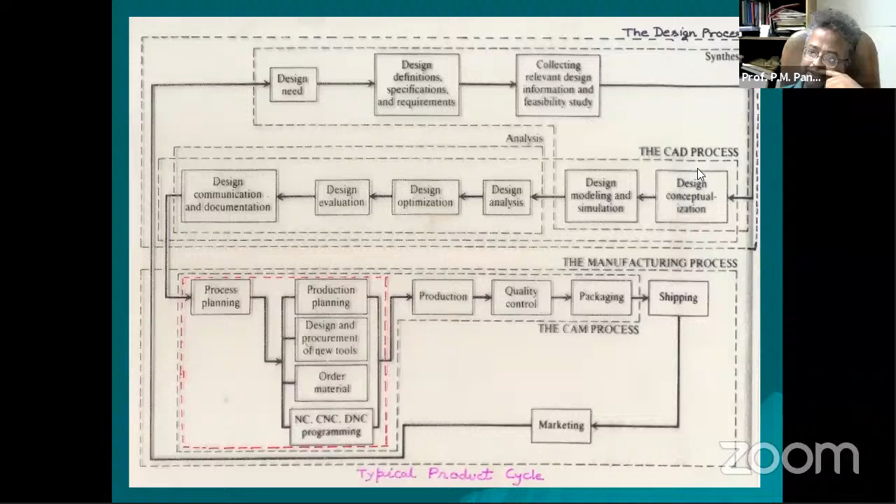Later on, in industry today, we go with the CAD process. In CAD, we try to conceptualize the design using some software. Then we try to do modeling, simulation. We try to analyze the complete design using, say, finite element packages. And then we do optimization, because any design we do has to be an optimum design. Only then can it form, actually make, a product. So we do the design optimization.

Now, once somebody has optimized a design, the next and foremost important step is to evaluate those designs. Because any product you have made, you have to first make a few copies of that product and do the testing. Only then will you become confident whether it is actually performing the same function for which it was designed. So this design evaluation becomes a very important function, and it also takes a lot of time.

Now why does it take a lot of time? Because when you have designed a new product or made some changes in a product, the changes or the new product may have typical materials, or very difficult surfaces to make. Because of these reasons, prototyping, or making the first few copies of that particular product, is a time-consuming job. And sometimes the situation may be that even the technology, or how to do that, may not be known.

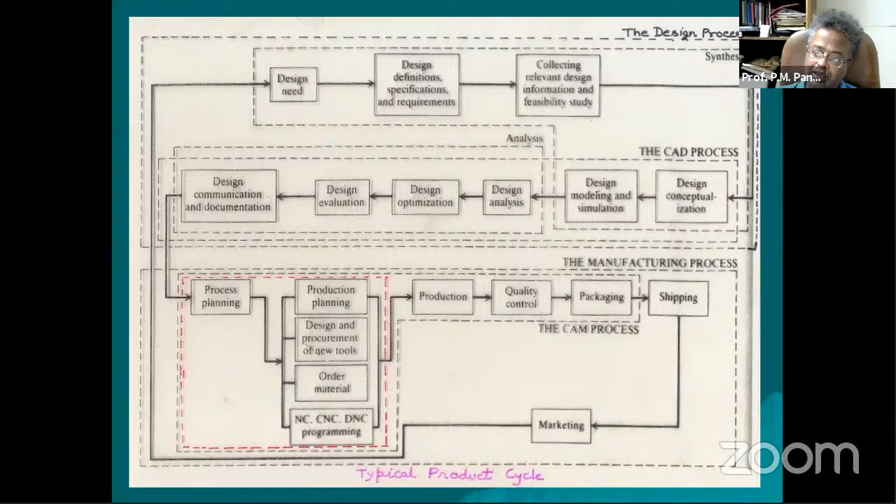And here is the importance of rapid prototyping, which has shown its importance. Because if you can do this particular function in a very short span of time, you may compress your entire project and be among the first to cater to the dynamic need of the customers, and you may be the best profit maker in this competing business scenario.

So that's why prototyping or model making is one of the important steps to finalize the product design. It helps in conceptualization of a design. Before the start of full production, a prototype is usually fabricated and tested.

Earlier, this activity used to be in the hands of skilled craftsmen. These skilled craftsmen used to work under the supervision of engineers, and they had a lot of experience. That's why they were fewer in number, and they used to take a lot of time. Their demand was high, and this function used to take a lot of time.

So people thought, why not go for soft prototyping in order to minimize the delays. People tried this in the mid 1970s or so. They tried to model things using 3D curved surfaces and do virtual simulation, virtual prototyping.

But that is not a very good approach, because once you are doing simulation, you are solving certain differential equations, certain equations, and the assumptions involved in that simulation come into your way. So though you will be close to the predictions, your predictions may sometimes not be that good. That's why people tried other ways.

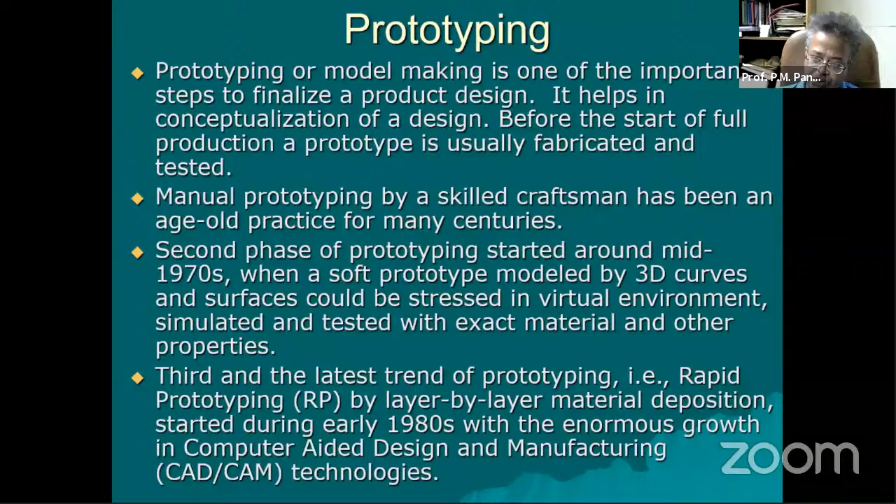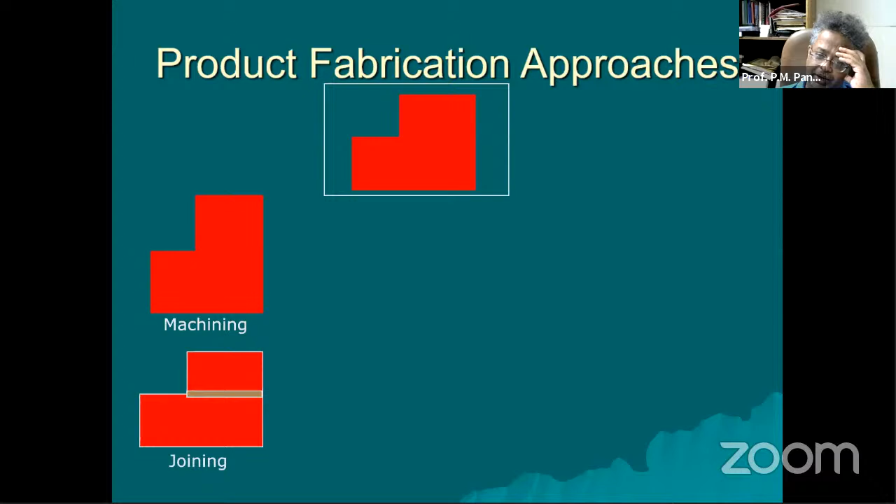Conceptually, it is quite simple, nothing difficult to understand. If you want to produce a product like this, one may remove material layer by layer, the way it has been shown in this slide, or you may have two blocks which are joined, or you may have a bulk of material which you deform using dies, which is known as forming. So this is another function by which you can produce it.

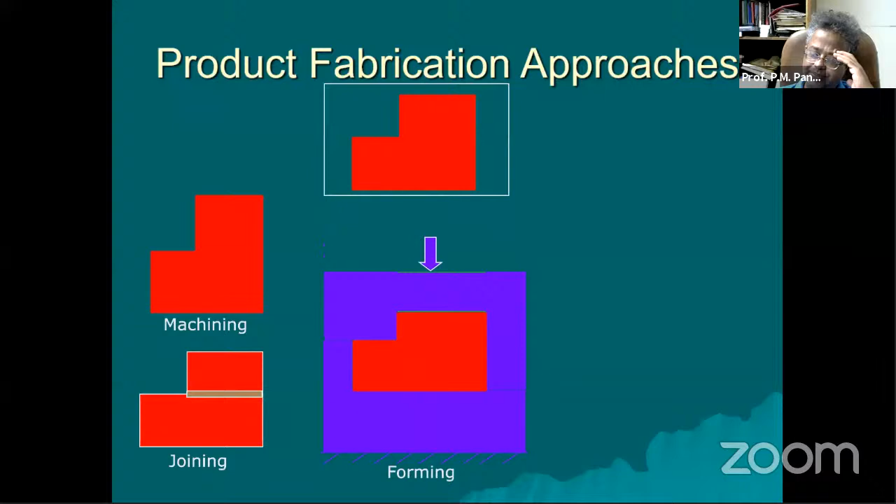But in this approach, it is a bottom-up approach where in the beginning there's nothing, and you are actually adding material layer by layer from bottom to top. This is the kind of approach we talk about in the case of additive manufacturing. So basically, in case of rapid prototyping, today we call it additive manufacturing. I'll tell you why.

From the definition point of view of additive manufacturing, we start with the digital model and then we slice it. After slicing, we cut these layers and stack these layers one over another, so we get a physical prototype like this. That's how we define additive manufacturing, based on the concept of layer by layer material deposition. So we have the CAD model, and from this CAD model, we are able to produce the physical prototype.

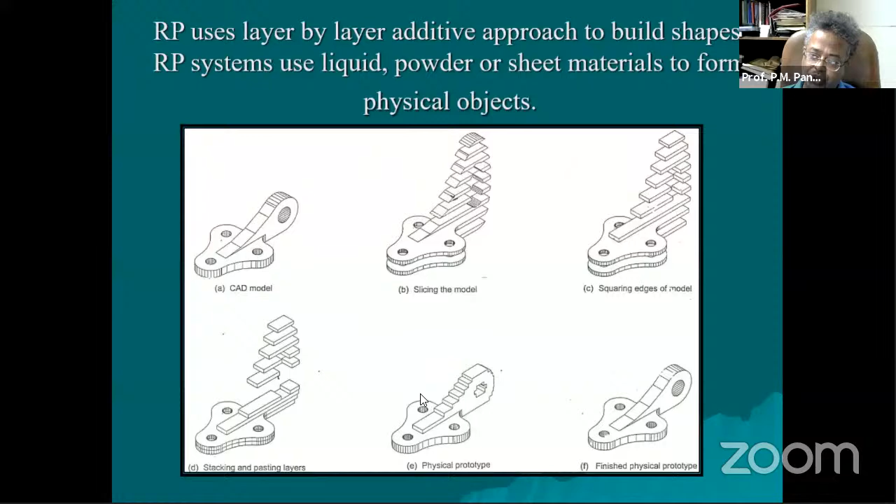You can see that this surface and this surface are not matching, there's a problem here also. Basically, these processes are actually 2.5D processes, not truly 3D, because along the Z direction, along the height direction, we are not doing any approximation or smoothening. It is just a vertical surface which we are producing, and that's why we are having this physical prototype with stair-stepping. So from here to here, you need to do some secondary operations to improve the surface quality, which is also known as the stair-stepping effect in rapid prototyping.

This is a standard rapid prototyping chain, which is published in various papers or books. We start with the digital CAD modeling of the component, and we save the component as an STL file. After that, this STL file is used to create the slices.

There are different softwares available. Nowadays there are even a number of freeware, open source softwares available, and Jaswinder knows them very well. He has been a very key person in doing all this, because in the beginning there were very costly softwares - I don't want to take their names, but they were very costly. Even today they are there, they come along with the machines, and suppliers recommend them, but you can also use the freeware softwares.

After that, this slice data is fed through a software once again to a 3D printer - today we call it a 3D printer - and that's how the 3D printer operates. You get the deposited component which needs to be post-processed. Once you do the post-processing, the prototype is tested, and if it is found okay, it's fine. Otherwise, you again go back and try to modify your CAD model. That's how you go ahead.

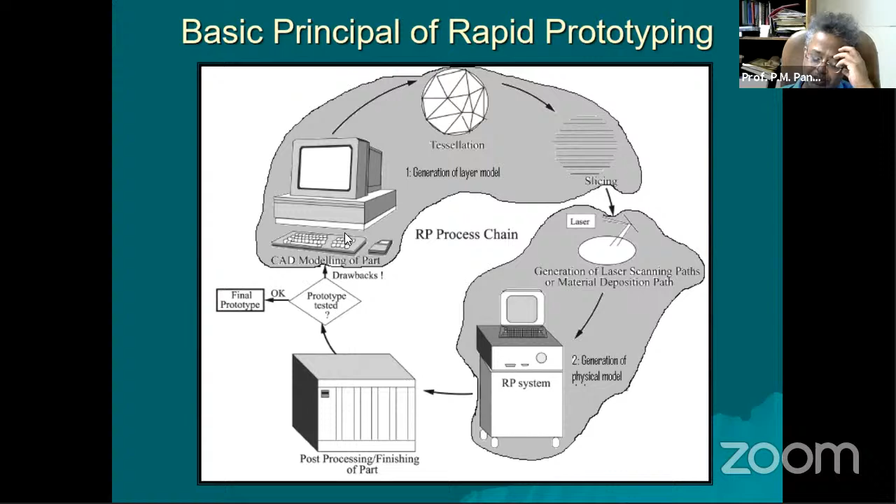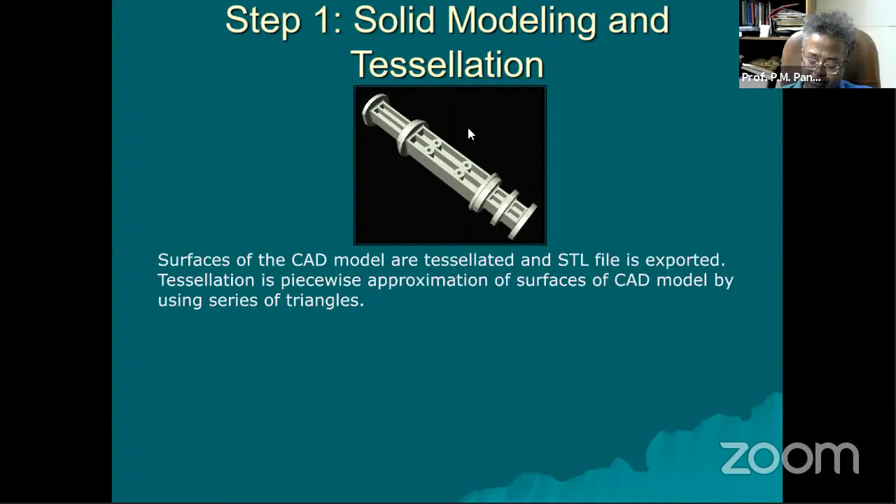This solid modeling is something we try to understand. This is how a solid model looks like on a computer screen - this is a virtual model, suppose it is a machine component. Then you try to tessellate it, that is the STL file. In the STL file, we try to approximate all the surfaces of that particular CAD model into small triangles, a piecewise approximation using a series of triangles.

This chordal error or maximum faceted deviation is used to control the size of the triangles, in order to preserve the intent of the design. I cannot go for very small triangles by considering a very small value of delta, but at the same time I cannot go for a very large value of delta, so that the triangles are very large and the intent of the design is lost due to this approximation. This is an intelligent decision which the designer has to take.

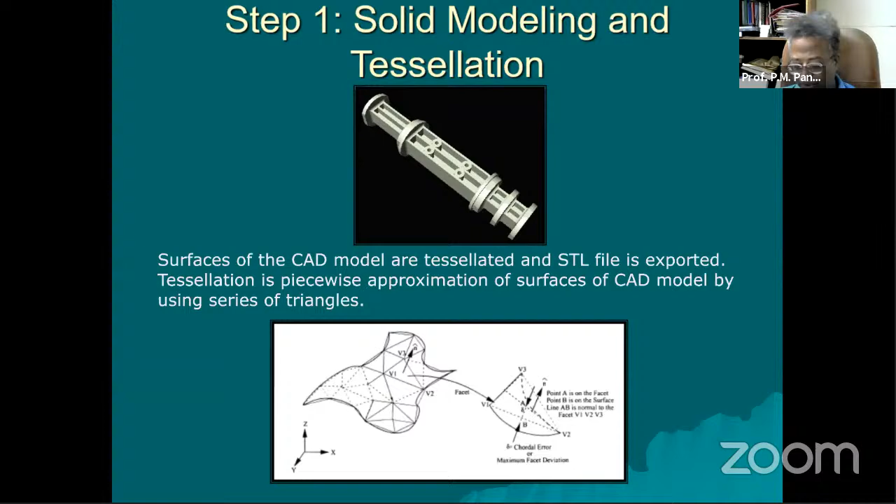Once you are done with the tessellation, you go for the slicing. What is slicing? Slicing is the intersection of horizontal planes with the STL file. Once you have the polyhedra STL file, you intersect it with horizontal planes, and you get a nested polygon - you may even get a polygon inside a polygon, so these are called nested polygons.

One such polygon at a particular Z height is written in terms of a standard format like SLC format or CLI format. So from bottom to top, you are writing every Z height, which forms one layer, in terms of this SLC or CLI file. If you see this figure on the right hand side, you can appreciate that there are different slices, and these slices are of different thicknesses.

Some slices are very fine, and at the same time, some slices are thick. What does this mean? Generally, you will not find any additive manufacturing system which will deposit like this, but this concept of slicing is known as adaptive slicing. This is done in order to have minimum possible build time, because the more slices there are, the more the part building time will be. So you want to reduce the building time, while also improving the surface quality. There will be some algorithm which decides what slice thickness is to be placed at what location, so that you get the best possible surface quality along with minimum building time. Then comes generation of laser scanning paths or material deposition paths.

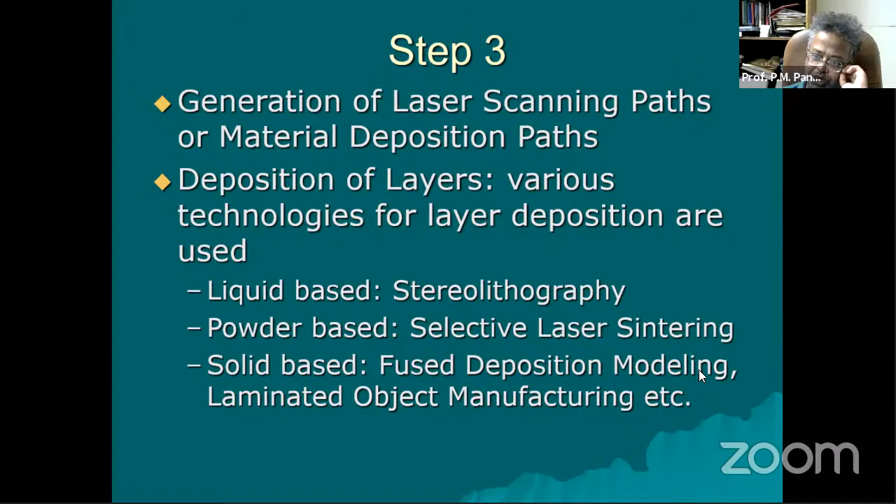Then the second kind of printers or systems are based on powder based technology. Selective laser sintering is one such technology which is quite popular and versatile. And among solid based materials, fused deposition modeling is a very versatile and well-known process. Most of the time you will see this because it is the most economical printer today, and its patent has already expired.

Once you are able to do this, you go for post processing, because the part you get from the printer needs to be post cured sometimes, definitely in case of stereolithography, because it polymerizes liquid, and the polymerization reaction keeps going on, so we need to do post curing. Then there's the support structure: because when you're depositing and you have an overhanging feature, you need to have a support structure. And then finishing by sanding, polishing, or painting, which is done in order to improve surface quality for various applications.

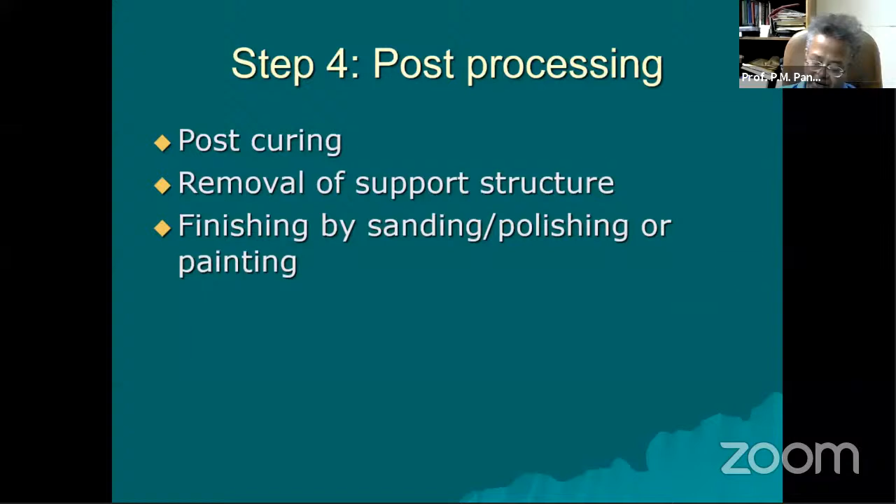So what do we have in a very short time? If I have a 3D printer, I can have the physical prototype in my hand within a few hours of time from a virtual CAD model. That's why we call it rapid prototyping in the beginning.

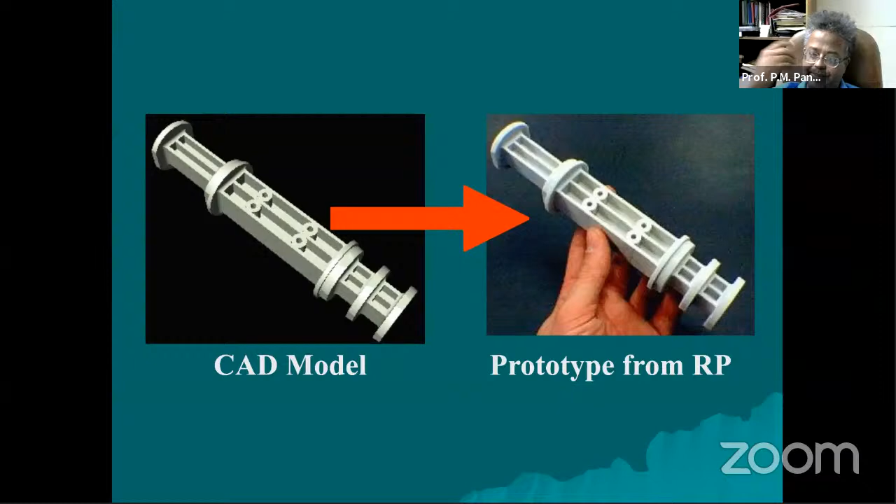Over time, in the past 25 years or so, there has been a lot of development in the area of rapid prototyping, and different names were given to these technologies. I'll tell you about that in my next slide.

What kind of data is used? One is obviously 3D CAD and then STL, which you can use to run a 3D printer. You can also have 2D data, a 2D drawing, convert it to 3D CAD, and run the printer. The third one is point cloud data.

What is point cloud data? Suppose you have an old machine in your premises and a component breaks down. You take out the component, 3D scan the two pieces, bring them into reverse engineering software, and join them virtually. After that, you can make the 3D CAD in the software, create an STL, and print it.

This kind of application is called reverse engineering, a very vital application. And I consider the most important application, where the real potential of these 3D printers or additive manufacturing is being utilized, is in biomedical applications.

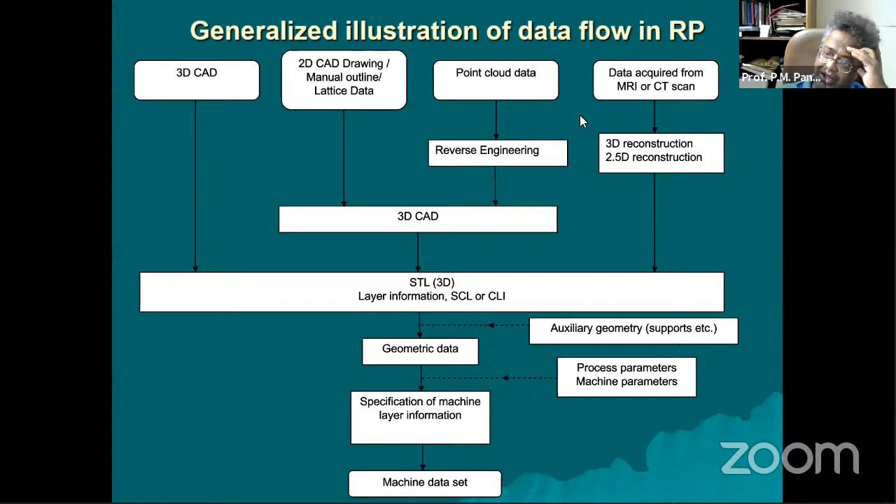In biomedical applications, we use MRI or CT scan data as input, which is converted into STL files by software like Mimics or Simpleware, and that STL file is used to drive the printer. So there are three to four important modes of input data by which we can run a 3D printer.

As I've already explained, if you bring rapid prototyping technology into your product design cycle as a prototyping tool, you can compress the product lead time by sometimes 90%. Various studies have reported such compression in manufacturing lead time, making this an interesting tool that lets someone launch a product very fast in the market, create different models, and be very competitive in a dynamic business environment.

These technologies were named rapid prototyping, generative manufacturing, solid freeform fabrication, layered manufacturing—so many titles came for this technology. But today it has settled down to 3D printing or additive manufacturing.

If you really want to understand the difference: if I use a small system that I can keep in my office or a small lab, a tabletop system, I call it a 3D printer. But if I use a big machine in an industrial environment, the system may be as large as a room, maybe 20 feet by 20 feet by 20 feet. If you're using that kind of system for industrial production or customized fabrication, you may call it additive manufacturing.

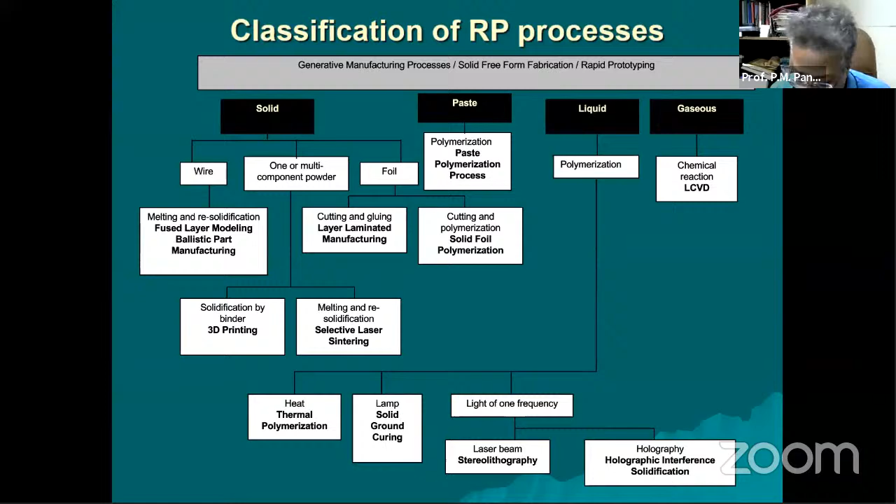So this is the first process which is known as stereolithography. Here what is being done is that the key here is the material actually. The material is a photosensitive monomer.

Now a monomer is basically small molecules. They are not long chain molecules. But once they are acted on by laser, that is the photon, then what happens? Free radicals are formed and they join - that is called a polymerization process. So a low molecular weight monomer gets converted into a long chain high molecular weight molecule. So that's how it becomes a polymer.

So here you can see the principle is simple. There's a platform on which you are pouring the photosensitive monomer, just equal to one layer. And then you have already calculated the data. So this galvano mirror will reflect the laser spot over the surface of this monomer layer. Wherever the spot moves, below which there will be a polymerization reaction, a solid voxel will be deposited. Once you are done with one layer, this platform will go down.

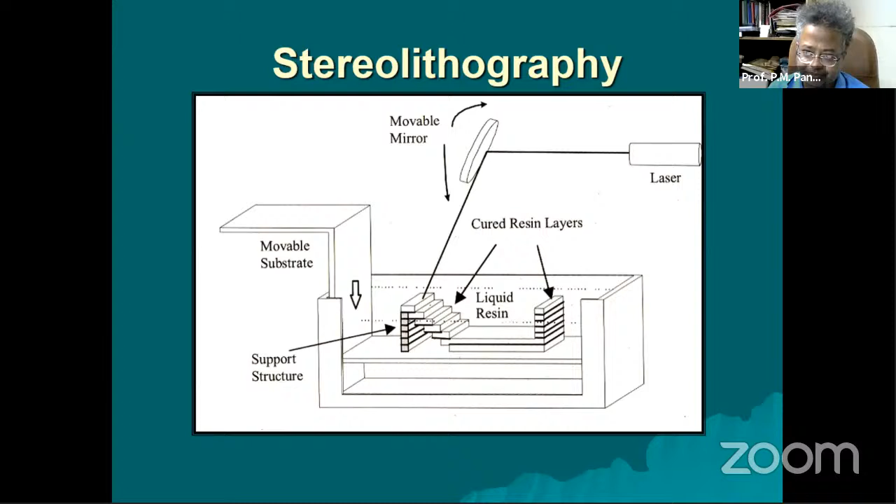After that, the other versatile system is called laser sintering, selective laser sintering. Now this sintering is very much different than the conventional sintering you may know in powder metallurgy. Here we do not apply any pressure - there's no compaction, nothing. What you're doing is simply spreading a layer of powder, and this layer of powder is as small as maybe 100 microns, 150 microns.

So in this case, what happens is that you need not plan for a support structure, because the powder present there is in solid form and acts like a support structure. So that is an advantage of this process - you need not plan for the support structure.

Then there's another important point - you can use polymer material or metallic material, provided they are available in the form of fine powder. So one can use a number of powders in this particular process, which is why it is a versatile process. The strength of the component is sufficiently good. The surface quality is also mediocrely good - not as good as stereolithography, but not as bad as FDM either.

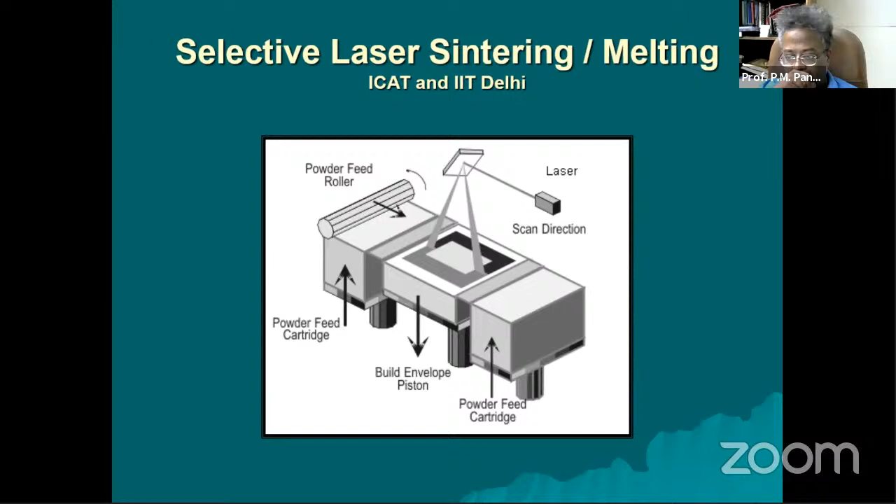So that's how you go ahead with this process. I will show you another slide also, where you will understand in a better manner. Generally this process is done in a closed chamber. In case of polymeric processes, high-end machines maintain a nitrogen environment, but in low-end machines, you will see that even a normal atmospheric environment works.

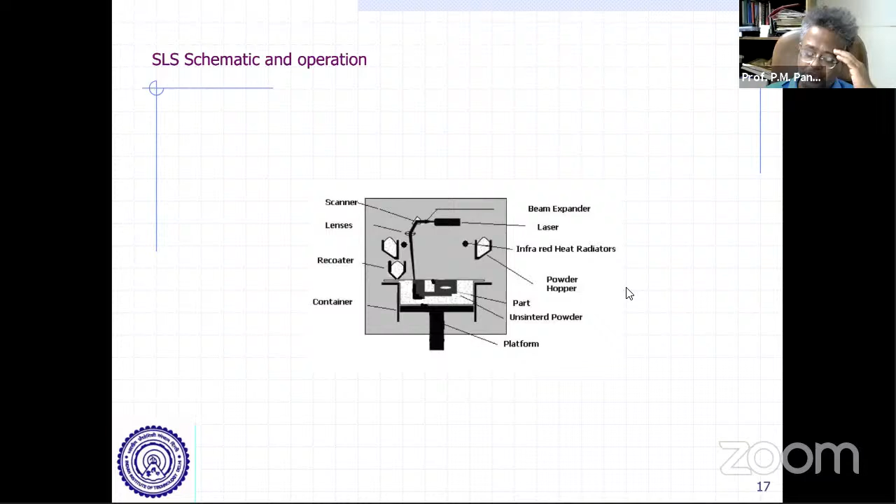So here the important point to be noted is that if it is a metal machine, we call it DMLS or selective laser melting. If it is a polymeric machine, we call it selective laser sintering.

The principle-wise they are the same, only the difference will be in terms of temperatures. If it is a polymeric machine, we hardly go up to 250 degree Celsius temperature, and if it is a metal machine, we go up to 1300-1400 degrees Celsius, because in a metal machine we need to deal with stainless steel material, nitinol, that is a shape memory material, super alloys like Inconel, and even titanium medical grade alloy like Ti6Al4V.

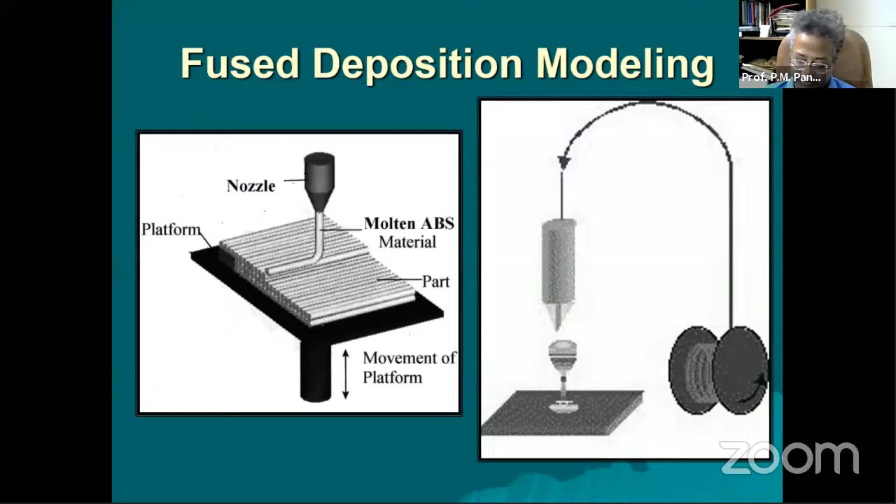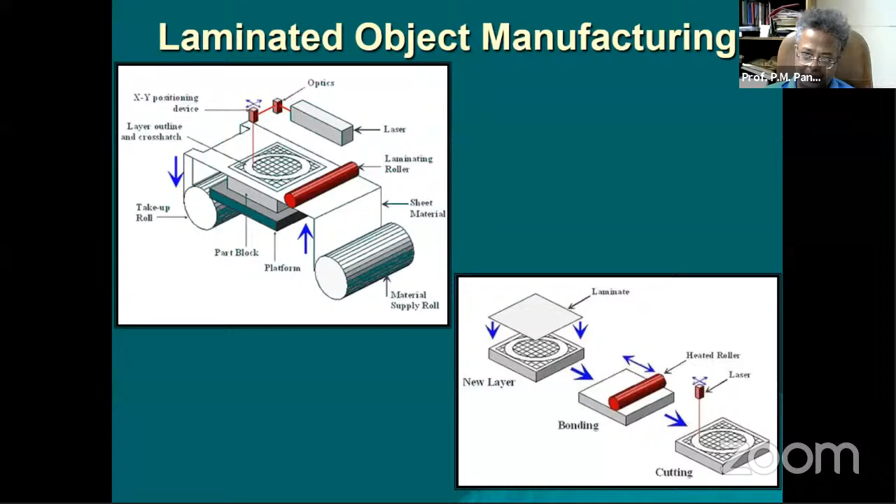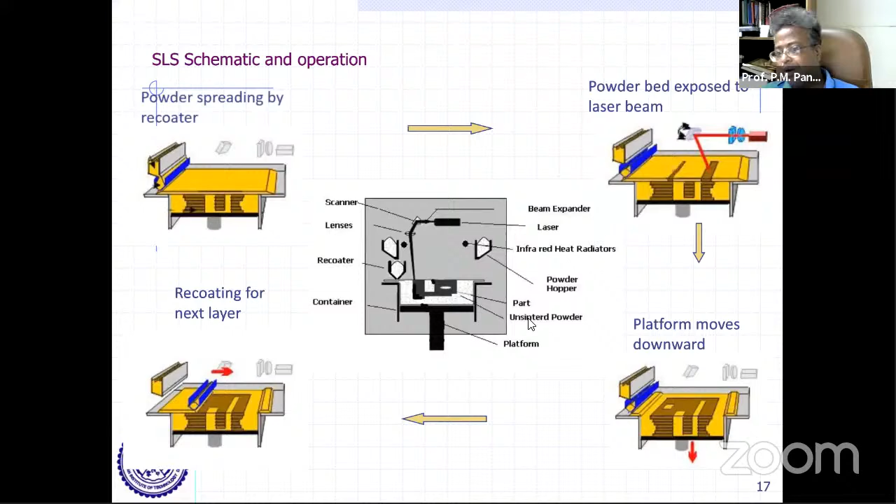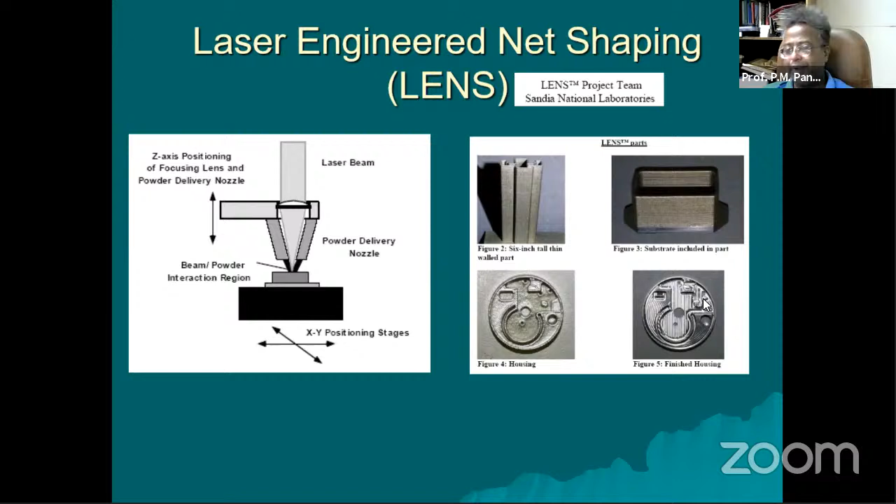This is one of the technologies I am personally very much fascinated by, because it appears to have a lot of potential, and we have only 1-2 machines in our country about it. But the limitation here is definitely the surface quality and accuracy, which are lower compared to powder bed technology. But it has additional advantages of making functionally graded material or repairing objects.

Like this wheel which is worn, I can use this LENS kind of technology, definitely using a CAD model and doing all the digital work, and after that we can repair the model. Like there may be a turbine blade that has got some pit, some material worn out, eroded because of the jetting action of the gas or the kind of turbine it is. So you need to fill up that pit, and you can use this process to repair that blade.

So let me go back to another set of slides where I'll show you the advanced processes now.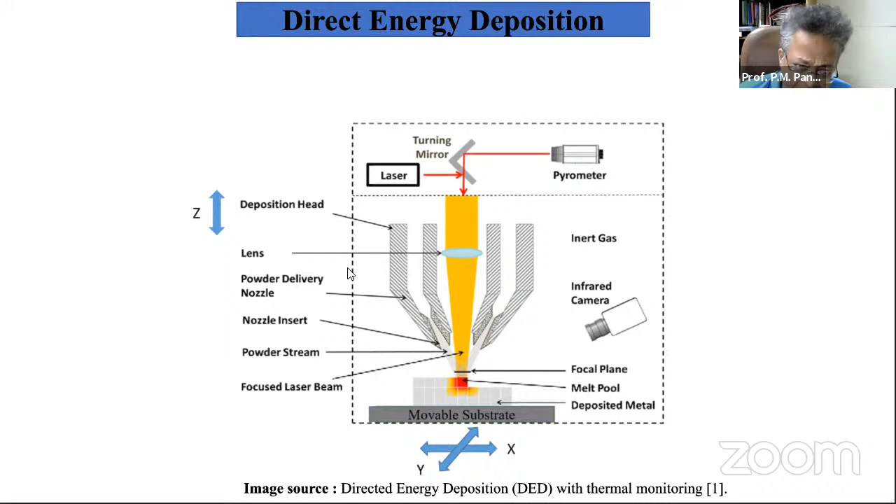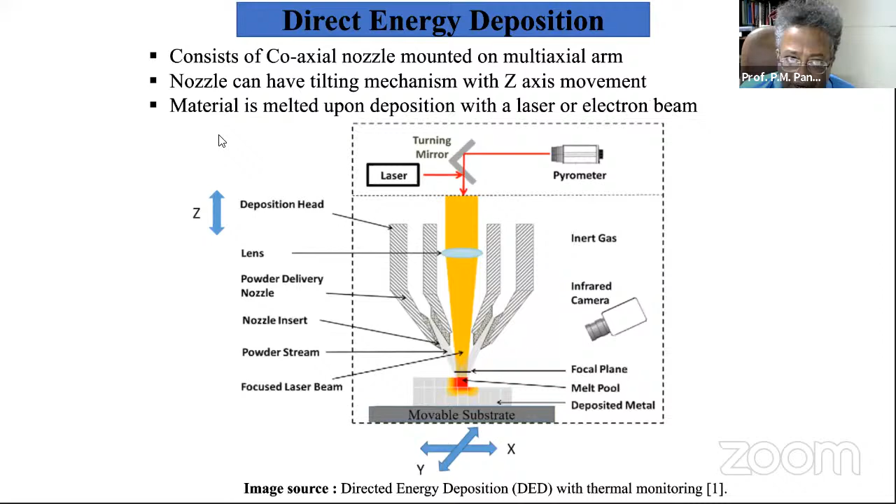There will be a coaxial nozzle mounted on a multi-axis arm. The nozzle can have a tilting mechanism with z-axis movement, and material is melted and deposited with a laser or electron beam. So you can see this video, you will enjoy this video. I have taken this from this particular source, which the reference has been given below.

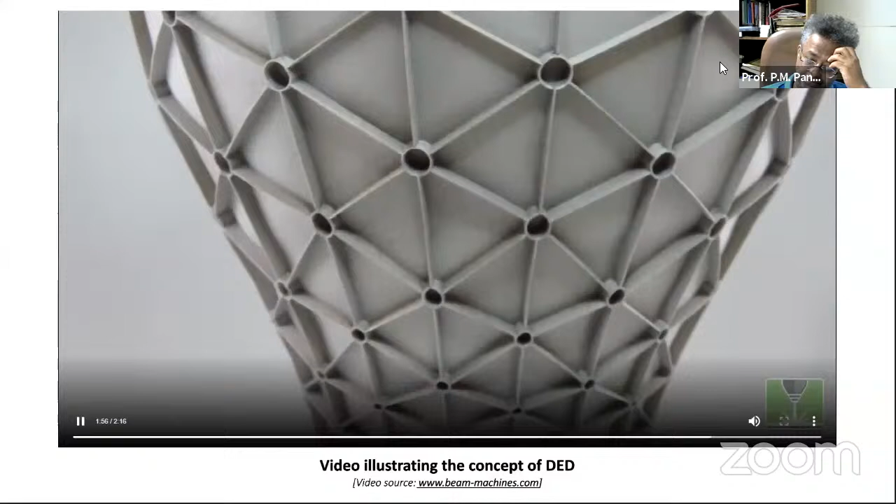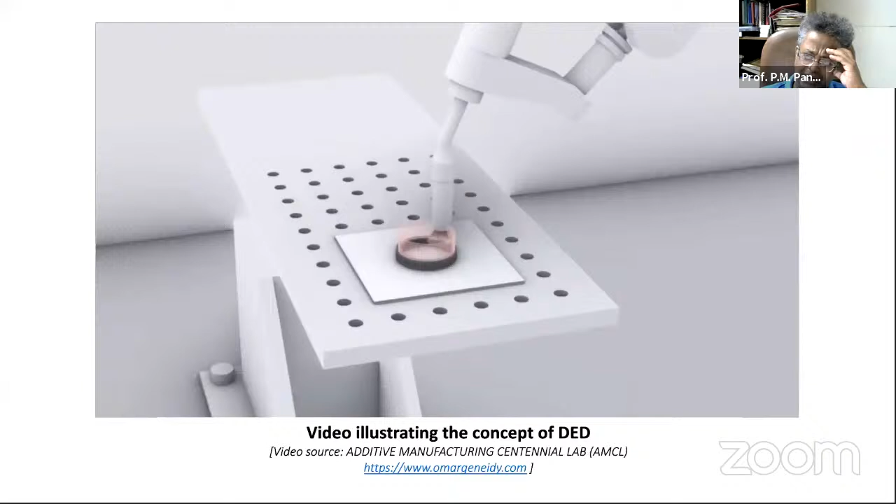Okay, then we can see another illustration of direct energy deposition. This is a virtual simulation kind of thing.

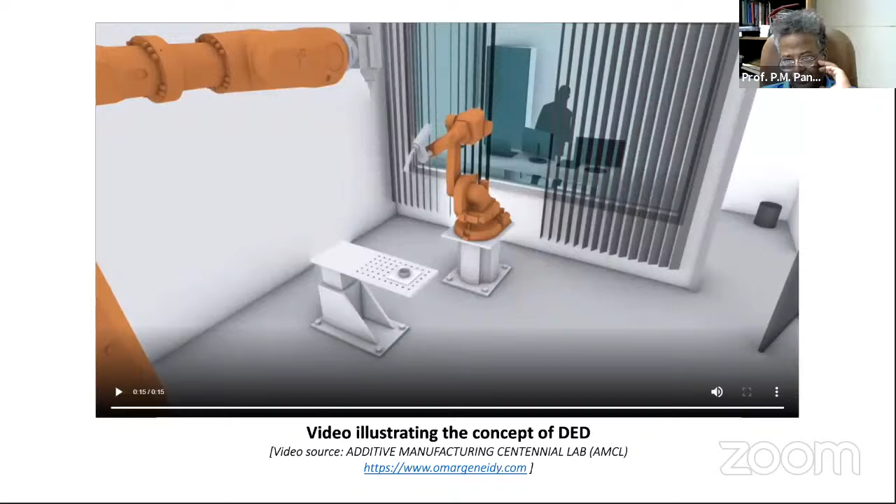So here we can say that we can create the components, parts directly by melting materials and depositing them on the substrate, mostly used with metal powders or wire source materials. Materials are melted using laser, and upon deposition, further materials are added layer by layer. They're suitable for fabricating multi-gradient materials, large size components, coatings, and they have fast build and rapid metal depositions.

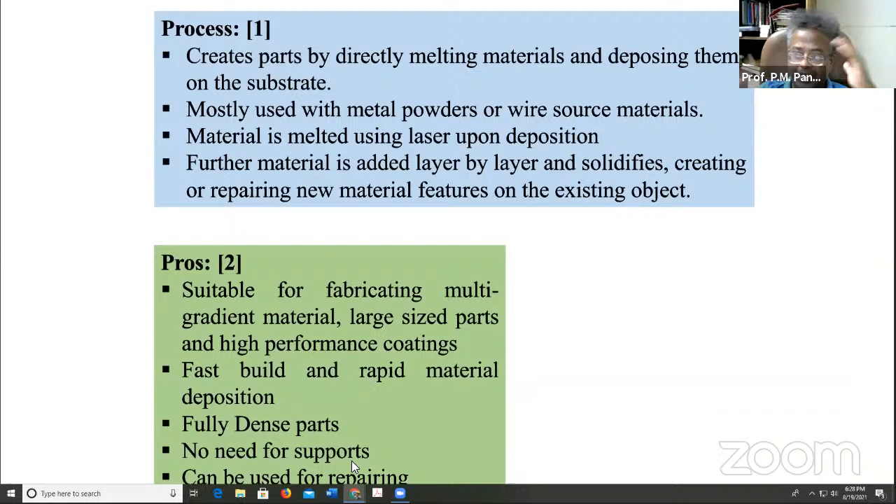As compared to the SLM process, which is a powder bed process, this has a very fast deposition. But accuracy wise, it is a little lesser and the surface quality is a little inferior. They're fully dense parts, no need of supports because you have a tilting mechanism, and it can be used for repairing also. So these are some cons I have already explained.

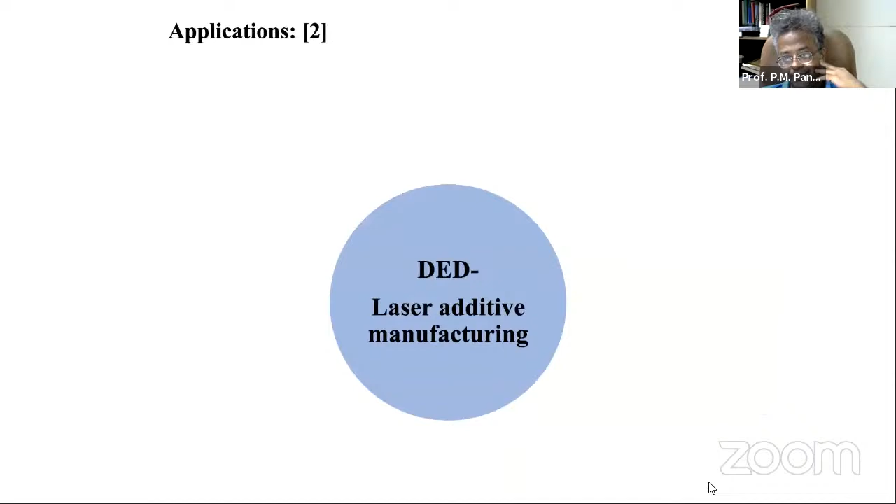This direct energy deposition has a variety of applications in various domains like aerospace, automotive, repairing components, nuclear, and various industries. You can imagine where, in which field you want to use it. So these are some acknowledgements for the material I have taken.

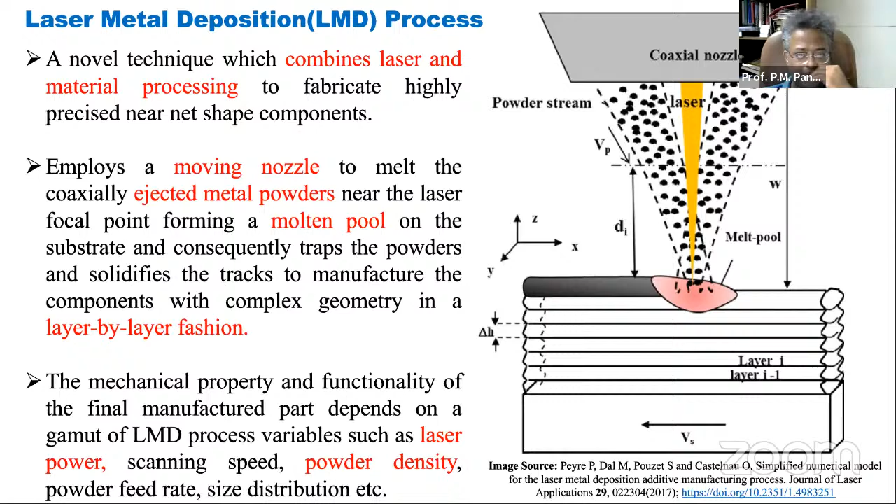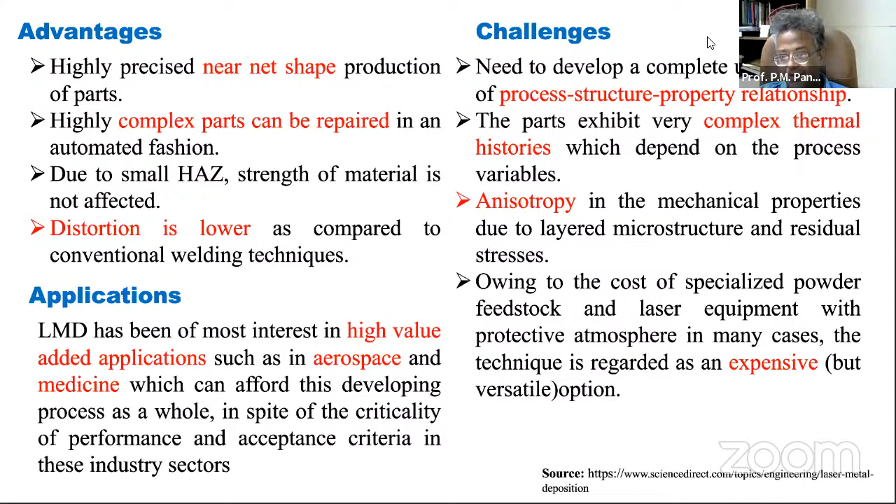If you really see, one machine cost after discount, for a system like ours, it will come to not less than 3.5 to 4 crore Indian rupees. And that is a small system, not an industry grade system. It will be a lab based system. So that's how these are costly.

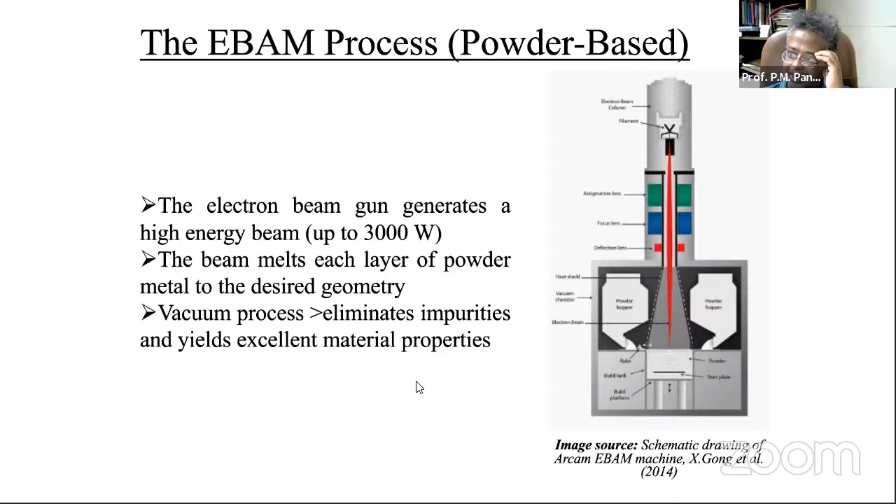Then we have another system called electron beam additive manufacturing, EBAM. It has both versions actually. There's a powder bed version, instead of laser we are having an electron beam of high energy, around 3 kilowatts. The process has to be conducted in vacuum. It eliminates impurities and yields excellent mechanical properties. It is a quite recent process.

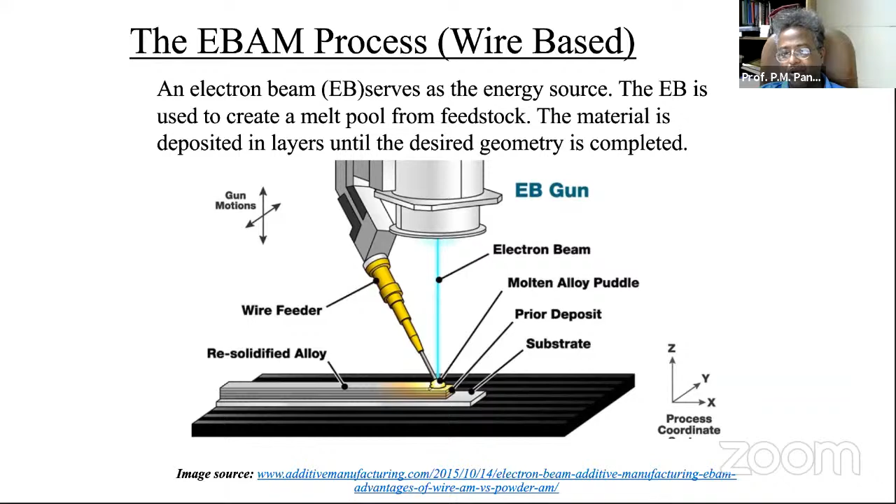Then we have another version which is wire based. So instead of having a powder bed, we have a wire feeder and an electron beam gun, and everything is done in vacuum. So you can again imagine the cost of the system, it will definitely be higher.

But here the good thing is that you get one of the few AM technologies capable of making fully dense functional components. You can create fine features here because you're using electron beams. It can efficiently assist development and modification of products, especially for complex, difficult to fabricate components. The residual stresses are low as compared to laser based processes or wire arc additive manufacturing, which I'll show in the next slide.

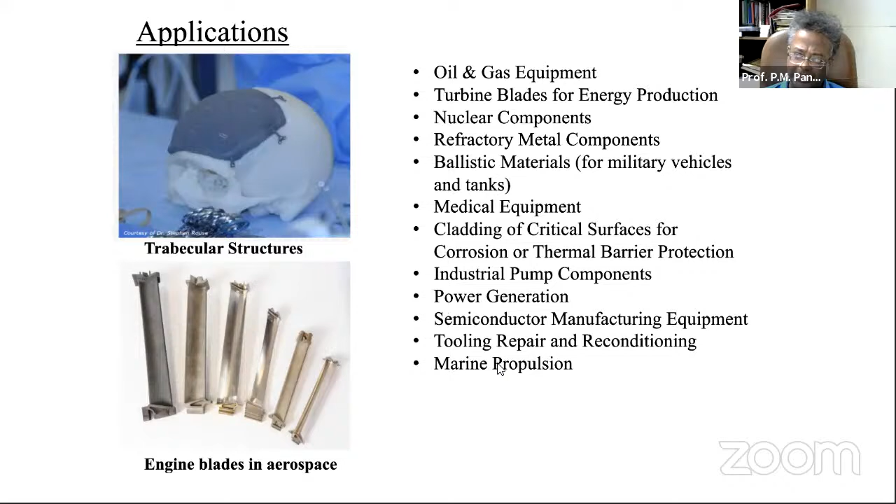Different components, different domains where you can apply this, starting from turbines to nuclear to medical to cladding to power generation to marine propulsion. So this is the technology. Then wire arc additive manufacturing. Here a welding process is used actually, a MIG kind of process is used to deposit the material, as shown in this particular video. So they all classify, they come in the category of direct energy deposition.

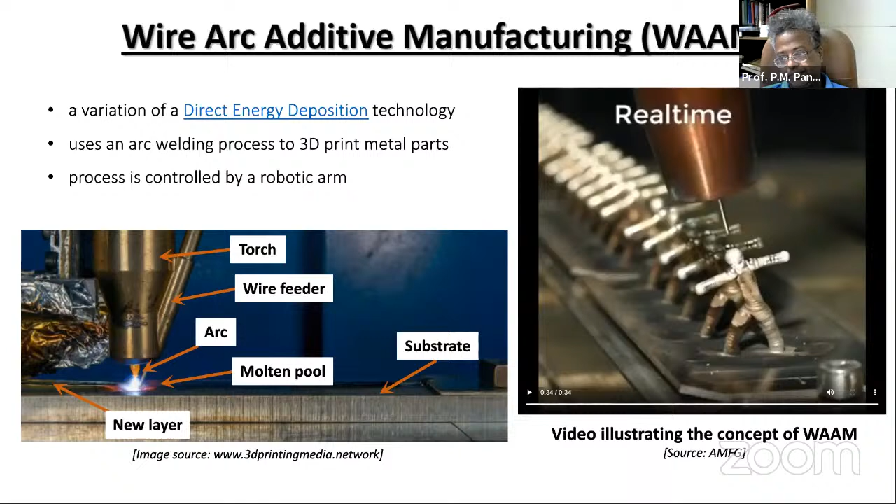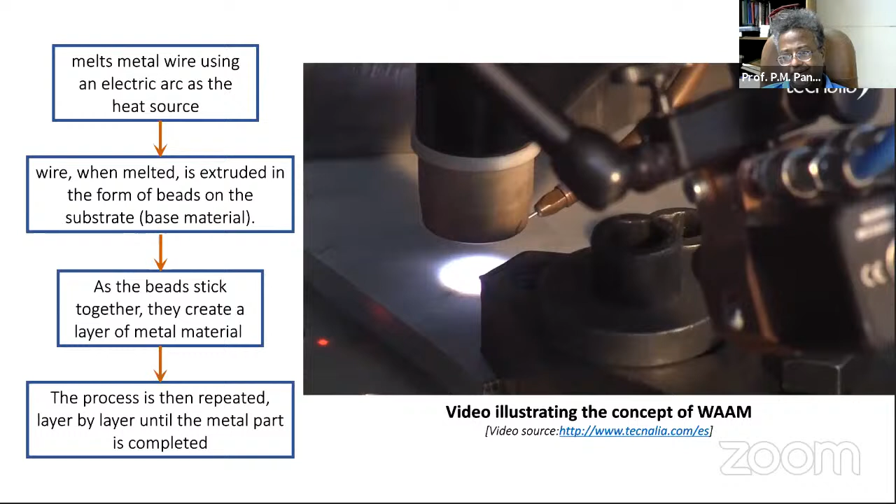You can see this video on WAAM.

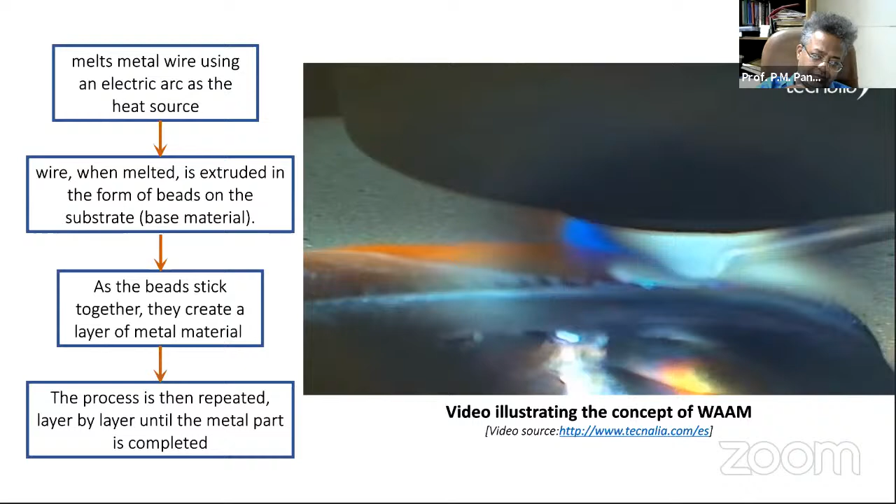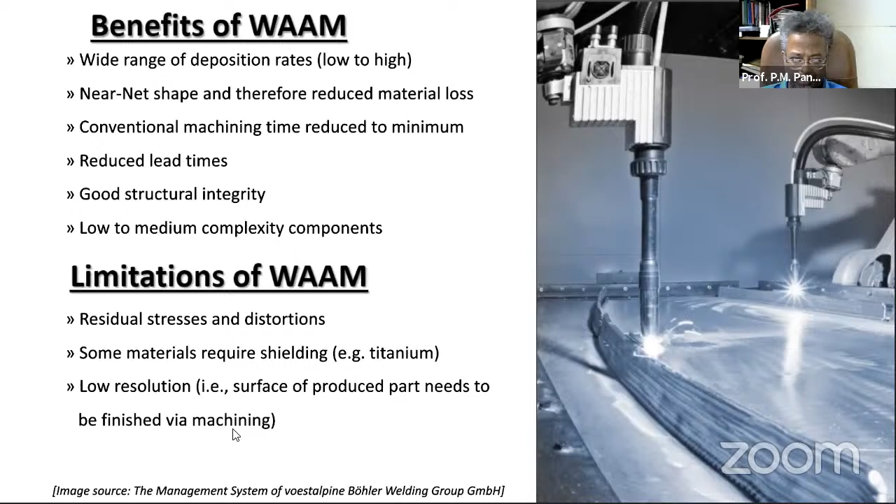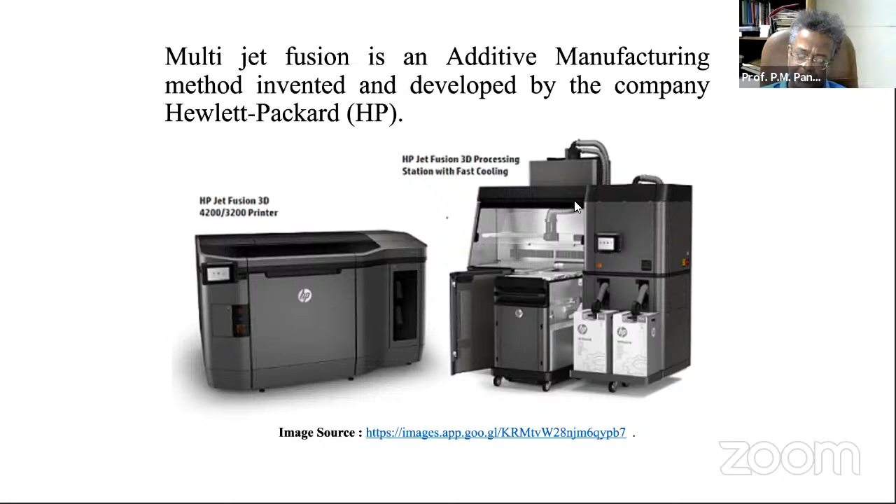Then we have one latest machine called multi-jet fusion printing technology by HP. This is also not a very old system. Here they deposit plastic, once again an ABS kind of material is being deposited. But here they are not using laser, instead they are using UV and two chemicals, one they call the detailing agent, and another called the fusing agent.

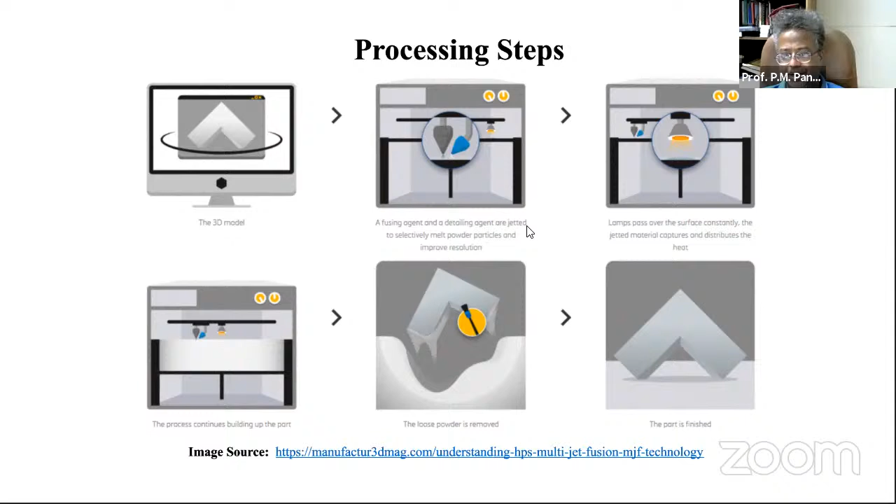So there's a layer of powder, and on that layer of powder they apply the detailing agent, then they put the fusing agent, and in one go they just push a lamp across. This is blown, so what happens is that you are able to do the curing in one go, one shot. That's why it's a faster printer. The accuracy is quite good, and you can see that this is a flexible material that can be printed.

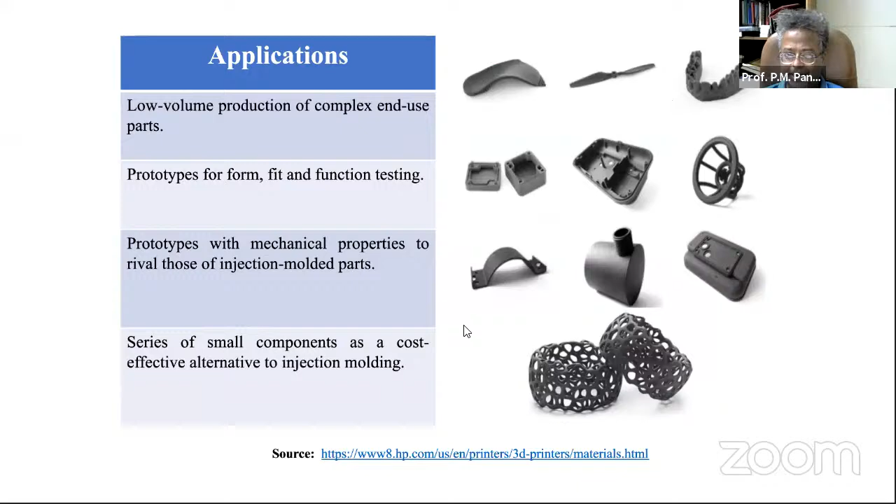It's a polyurethane and polyamide material, parts with very high strength, they can be printed. So these are various components you can see which are being done by this HP printer.

Then DLP is another technology, which I have come to know about only a few months back. So here the concept is: DLP printers use a light projector, similar to what you would find in a movie theater, to project the image of an entire layer simultaneously, regardless of the number of parts. Because they cure a full layer in a single flash, DLP printers can be outstandingly fast. They are also very reliable with low complexity and no movement.

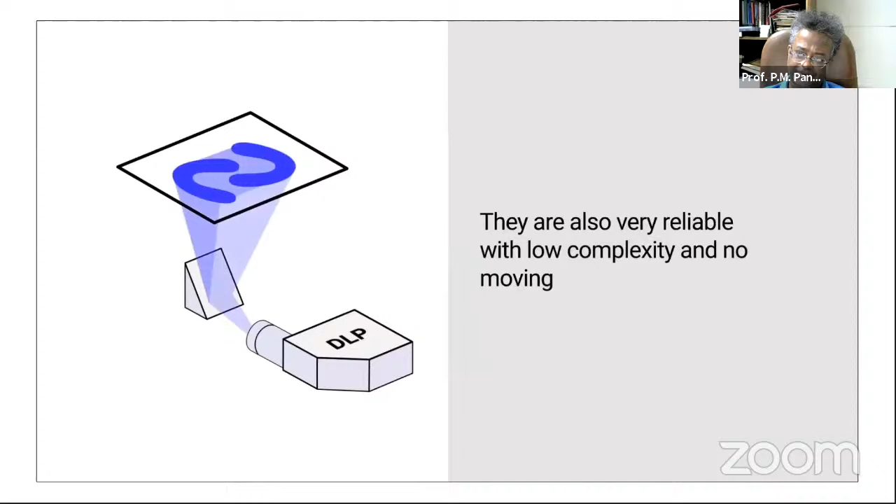So this is the system actually. In one go, you are covering the entire layer. In case of stereolithography, there will be a point that will move, but here in one go you are covering the entire layer, like in case of movie projection. You can see that in SLA this laser spot keeps moving, but in this case one layer will go in one go. So here also you are using photosensitive monomer to print.

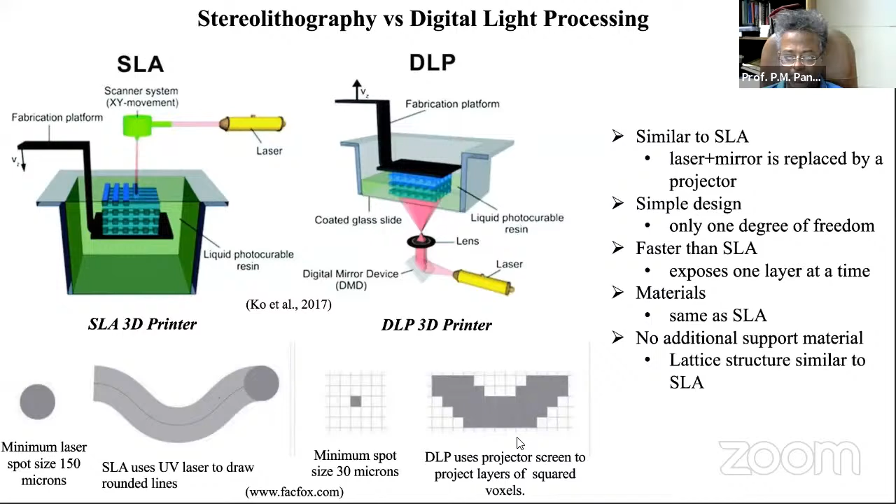But I think because there's a lot of competition now, if the sections are large then this may be faster, but if the sections are thinner and there is a lot of intricacy, then SLA may be better. So it will depend on the situation, which one will be a better system. You can see there are different applications which people have kept on their websites or various sources which I have picked up from there.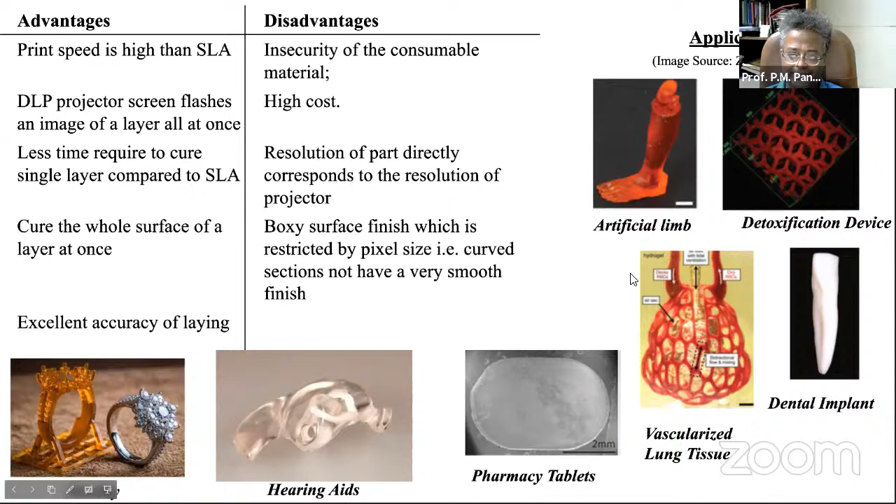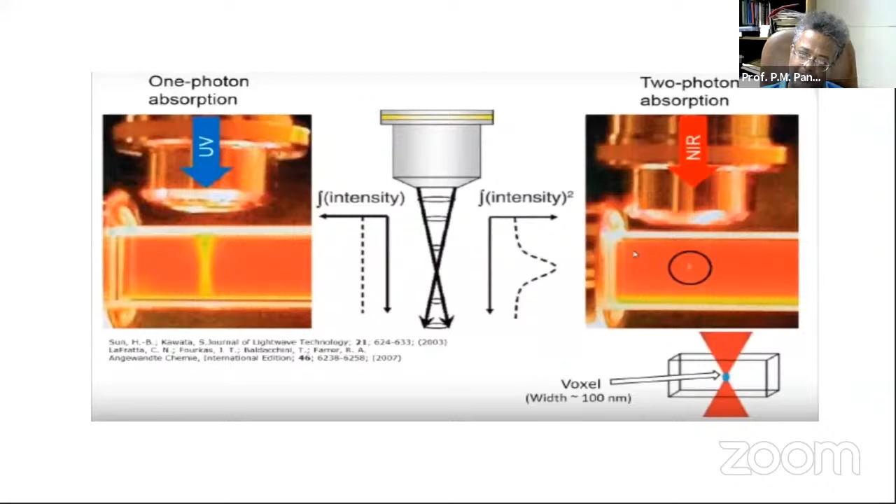Then another important process is called two-photon polymerization 3D printing technique. It is mainly for medical use, for making micro components. Here the concept is there's a conical laser beam, and once the laser is conical, the energy intensity suddenly becomes very high. So in this zone only there will be polymerization. I can focus in such a way that I can deposit a voxel, a volume as small as 100 nanometers in size, so that's why it becomes a very interesting process, and we get high resolution of the order of 100 nanometers.

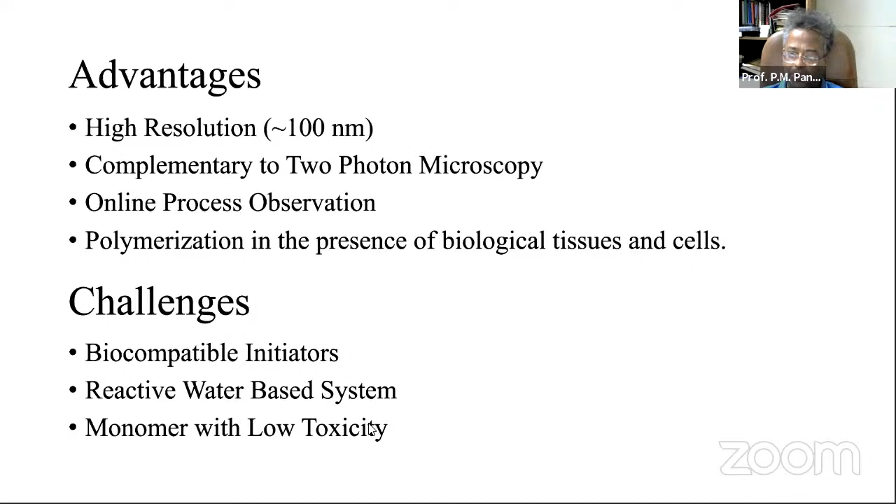It is complementary to two-photon microscopy. There's an online process observation available, and we have polymerized in the presence of biology. This is an important feature because our biological tissues and cells are much larger than this 100 nanometers. So you can do polymerization in the presence of these biological tissues, but you need biocompatible initiators and monomers with low toxicity. It has a number of applications in different zones and technologies, including metamaterials, tissue engineering, photonics, MEMS, microelectronics, etc.

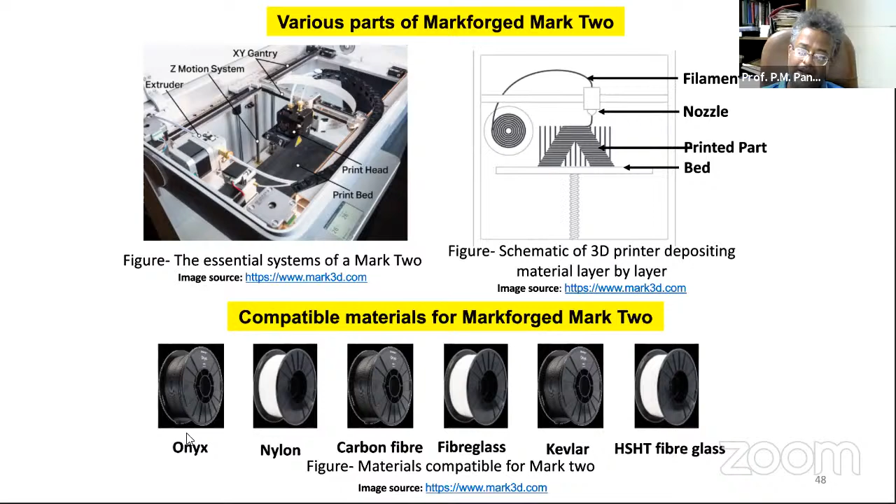Then we have another printer which is called Markforged printer. It is used to deposit composites. It works on the principle of fused filament fabrication only, but it's a very precisely developed machine where very fine spools of nylon or carbon fiber, or maybe some other kind of fiber, can be deposited alternatively, or there may be a material called Onyx which has chopped carbon fiber. So you can deposit Kevlar, fiberglass, etc. Alternatively, you can have a particulate kind of situation.

So you are able to do a lot of things with this kind of printer. Now you can see the kind of applications which are present. With this printer, we have this printer at IIT Delhi, and we can produce these kinds of workable components which are actually working — it's a shock absorber, it is a carburetor, it is a jaw to hold something during machining. So these are working plastic and composite components, but they are directly usable.

So today, what happens is we started with rapid prototyping, which was a very initial, primitive process. And today we are even able to print composites, and we are having metallic printers where we are making implants, we are having composite printers where we are making these kinds of components.

So today we are calling this technology additive manufacturing technology, because it is no longer just a design tool. Though it is a design tool also, today it is a manufacturing solution for various kinds of technologies, or it can provide technological solutions for various problems directly, correct?

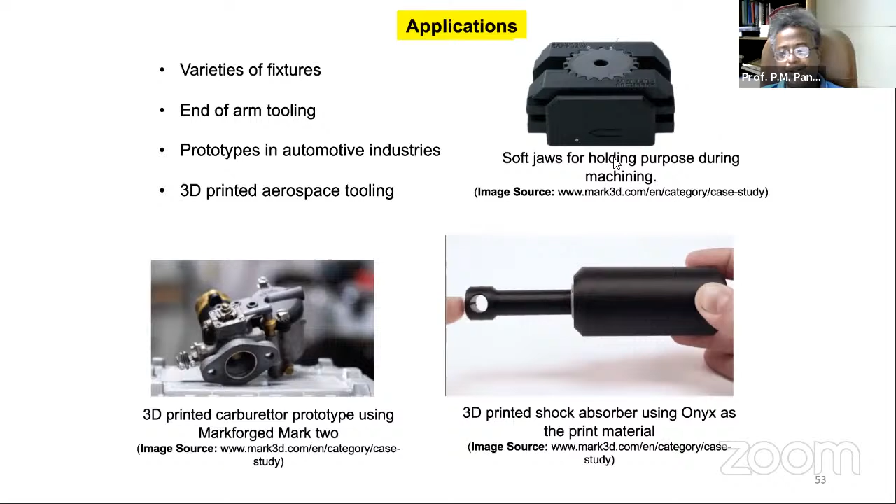So with this, I'll stop here. I think I have taken sufficient amount of time, and if there are any questions, I request the audience to please ask.